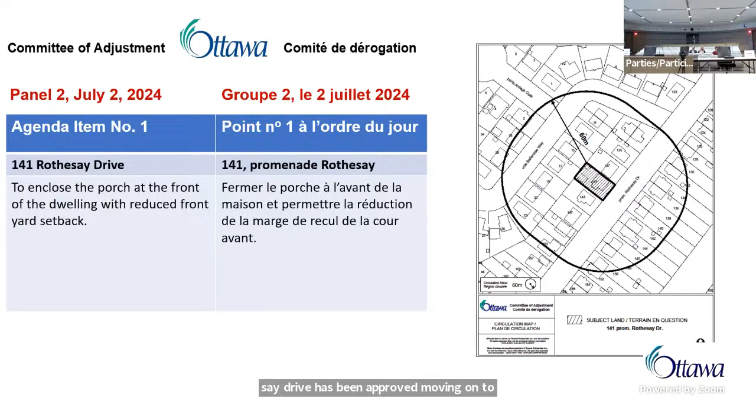Moving on to application 2, 1356 Louis Lane. All those in favor of approval of this application, please raise your hands. Application for 1356 Louis Lane has been approved.

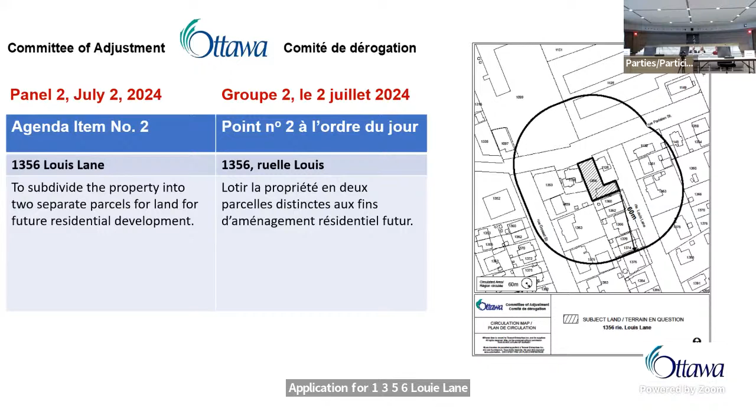Next application is 1359 Gosset Street. All those in favor of approving this application, please raise your hands. This application for 1359 Gosset Street has been approved.

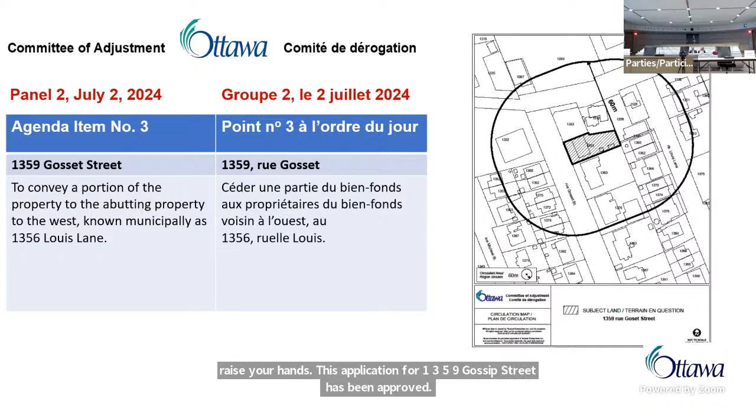Moving on to application for 556 Mansfield Avenue. All those in favor of approving this application, raise your hands. That application is approved for 556 Mansfield Avenue.

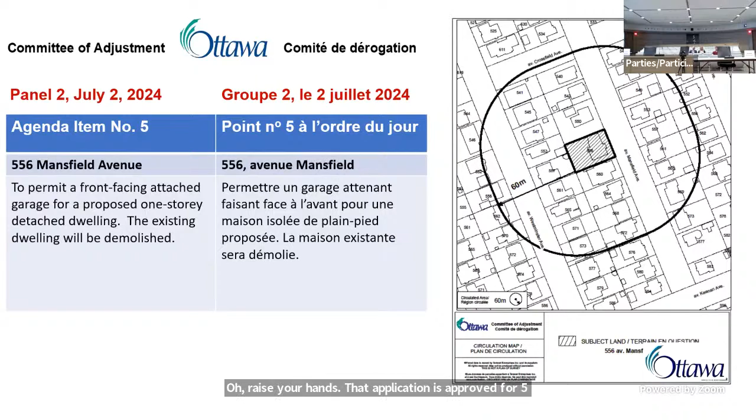Next on the list is 383 Longworth Avenue. All those in favor of approving this application, please raise your hands. Application for 383 Longworth Avenue has been approved.

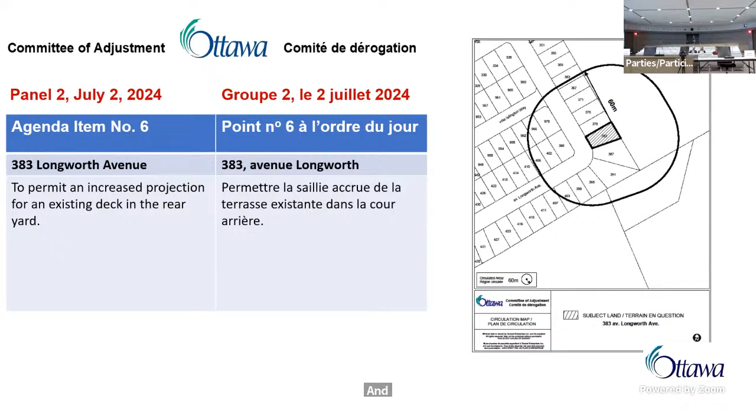And now the last unopposed application is 130-150 Rossignol Drive. All those in favor of approving this application, please raise your hands. That application for 130-150 Rossignol Drive has been approved as well.

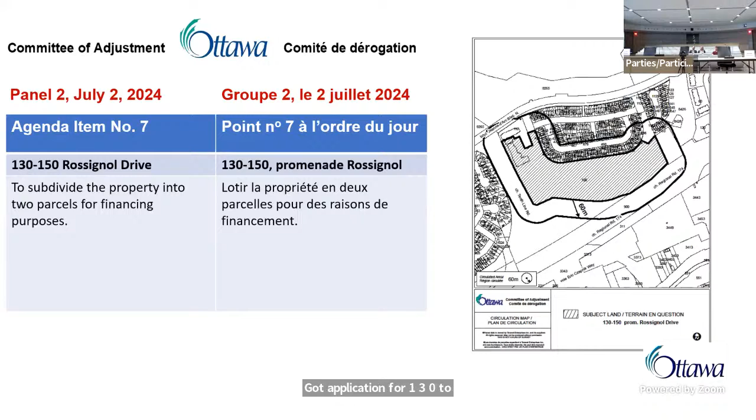Now we'll move on to the applications in order, beginning with 630 Montreal Road. Nadia De Santi, are you available?

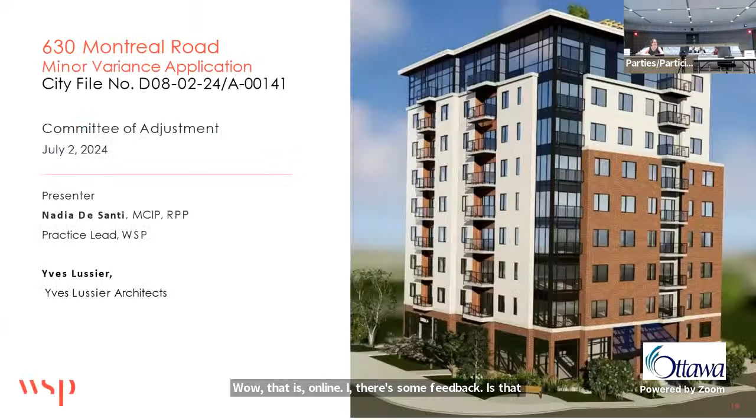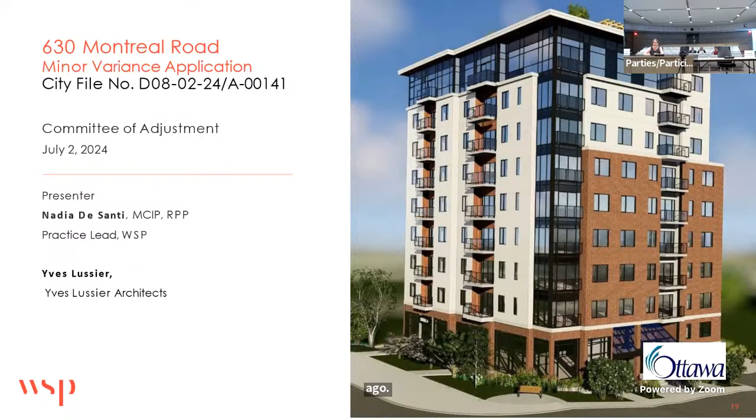I would like to start off, Mr. Chair, to indicate that this site did come before the Committee of Adjustment a couple of years ago and was adjourned. We've also been working with city staff on a site plan application that's been ongoing concurrently. We're at the tail end of that approval. There's just a phase 2 ESA report being conducted, and this process needs to complete before we can resubmit on the site plan with that additional report and hopefully get city approval. So next slide, please.

So 630 Montreal Road is an irregular shaped lot. It's a corner lot that fronts on Montreal Road, and the side street is Borthwick Avenue. It is approximately 0.103 hectares in size. It contains, or currently has, a one-story building and a one-story detached garage sitting on the site, both vacant. To the north of the site is a 14-story high-rise building, as well as some parks and commercial and retail, as well as some low-rise residential to the east and south.

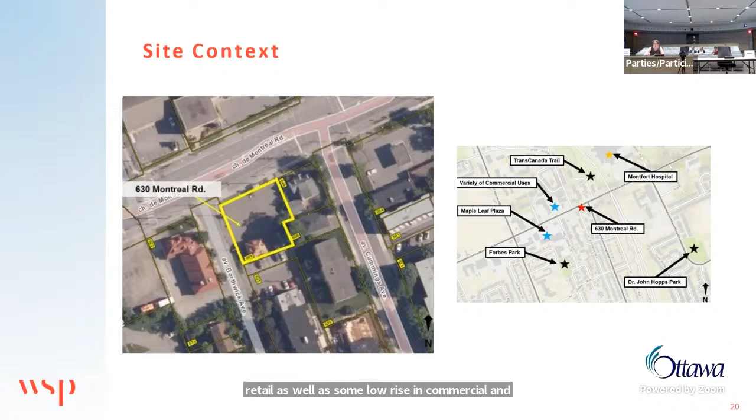Next slide, please. The proposed development is for a 9-story mid-rise mixed-use building with commercial at grade and containing 56 dwelling units. Our client has indicated that they are looking for 15 to 25% of those units to be affordable housing. They've had conversations with CMHC and continue to do so, so the intent is that it would be rent-geared-to-income units for this property, and it would contain a mix of 1 and 2 bedroom units.

The commercial space on the ground floor is about 206.5 square meters, and the residential units would be located from the 2nd to the 9th story. The proposal includes an underground parking garage containing 33 parking spaces, 29 for residents and 4 for visitors, as well as 39 bicycle parking spaces. There's a mix of landscaping and internal pathways to provide connectivity within the site and to the surrounding road network. There's a total of 17 ornamental and small ornamental trees proposed to be planted along the front, corner and interior side yards, as well as shrubs and perennials.

The proposed variances we're seeking are: a rear yard setback from 7.5 meters to 1.697, shown by the yellow on the bottom of the site plan, to the concrete wall for the underground parking garage, specifically the wall of the concrete ramp going down. We're also seeking interior side yard setbacks of 0.32 and 0.96 meters. The site jogs a bit in the southeast corner, so the setback requirements are a little complicated - we meet the requirement for the first 20 meters, but towards the back end of the property we don't comply. We're also seeking a building height variance, so 5 variances total to permit the 9-story building.

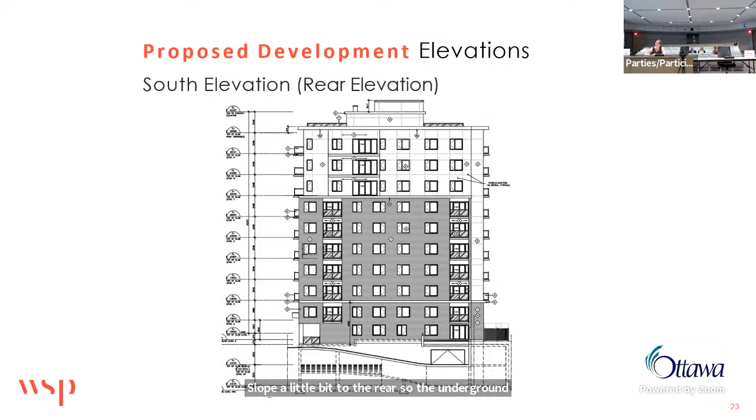I'll just go quickly through the elevations, please. Sorry, I can't see the timer so I don't know how much time I have left. Okay, so quickly through these - north elevation, next slide please. The south elevation, you can see here the property does slope a little to the rear, so the underground parking is designed to accommodate that slope and the ramp. Next slide, please.

So from the official plan perspective, the site is designated within the urban boundaries, part of the outer urban transect. It's designated as corridor Main Street, subject to the evolving neighborhood, as per Schedule B3 outer urban transect. A range of residential and non-residential forms and uses are permitted. The proposed 9-story apartment building is within the maximum permitted building height of 40 stories for lands designated corridor Main Street.

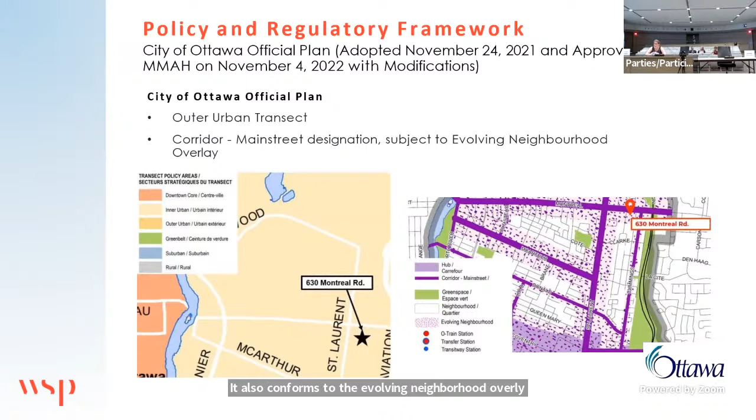It also conforms to the evolving neighborhood overlay policies, which supports development that permits and promotes intensification, new building forms and typologies.

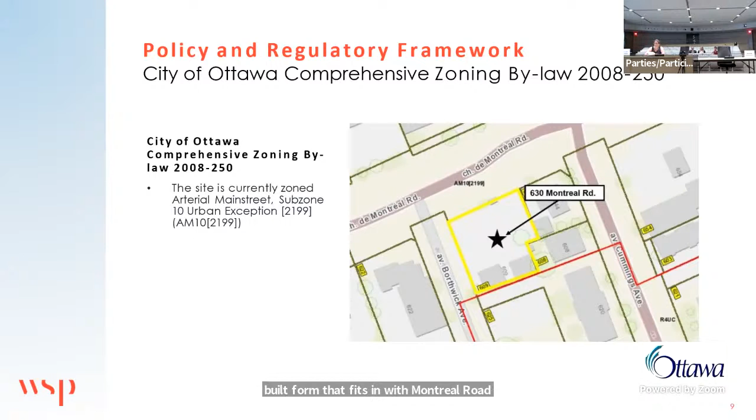The existing site is zoned Arterial Main Street, Subzone 10, Urban Exception 2199. Subzone 10 contains special setback and building height requirements. The exception is for an automobile dealership, which is not a use being proposed for the property. The proposed development complies with the majority of the applicable provisions of the AM10 Exception Zone 2199. The development has been designed to reflect a compatible built form that fits in with Montreal Road and Borthwick Avenue. As mentioned, there are 5 variances shown on the next slide.

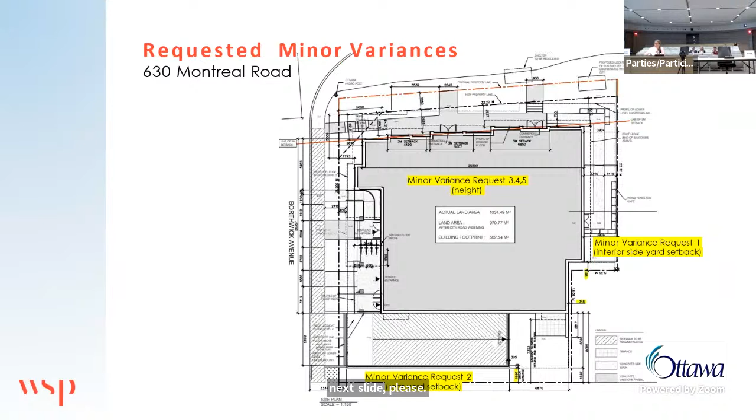I'm just going to go through the 4 tests. The variances that we're seeking are minor. The interior side yard and rear yard setbacks and the increase to the building height are required to accommodate the new building footprint and the 9-story building.

Given the site's irregular and unique shape, it would provide housing units, including affordable housing units, and commercial floor space. The maximum building heights are required to accommodate the proposed development, which aims to provide residential intensification and commercial development in an urban area along Montreal Road, an arterial road as designated in the official plan. This area is a prime location for this type of development, contributing to the overall mix of uses. Furthermore, there is a similar development with a higher building footprint to the north, a 14-story high-rise building.

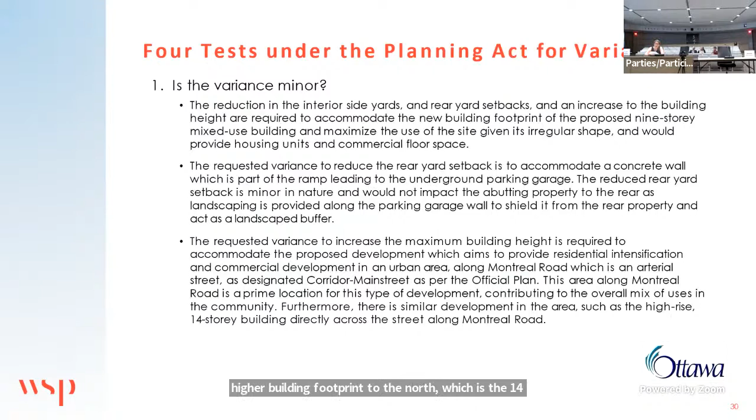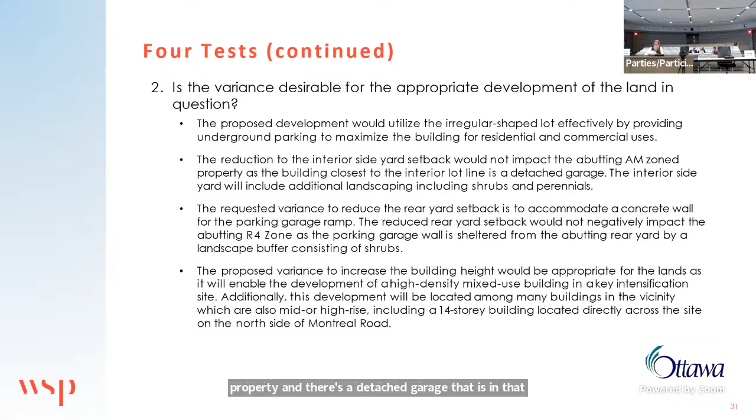The variances are desirable for the appropriate development of the land. Given the irregular shaped lot, we are seeking some variances to accommodate that. The interior side yard setbacks abut the adjacent property, and there's a detached garage in that corner where the interior side yard setbacks are being sought.

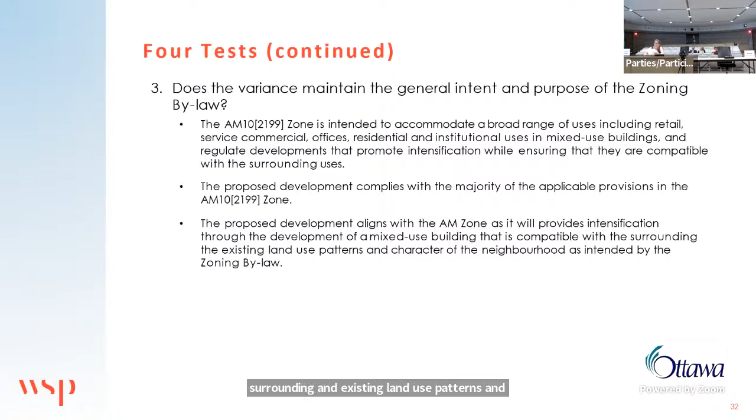The proposed development maintains the general intent and purpose of the zoning. The uses are permitted; there are just a few provisions that we are seeking variance for. The mixed-use building is compatible with the surrounding and existing land use patterns and character of the neighborhood as intended by the zoning bylaw. And finally, the variances maintain the general intent and purpose of the official plan.

As mentioned, the site is in the outer urban transect. Montreal Road is a corridor Main Street and is in an evolving neighborhood overlay. The official plan permits building heights ranging up to 40 stories. The proposed development at 9 stories is within that permitted maximum height, and it also includes a mix of residential and commercial uses.

Therefore, the proposed variances maintain the intent of the official plan by maintaining the provisions of the outer urban transect in the corridor Main Street designation. It also supports the city's housing goals of increasing housing options while maintaining the character of the surrounding neighborhoods in terms of land use and design.

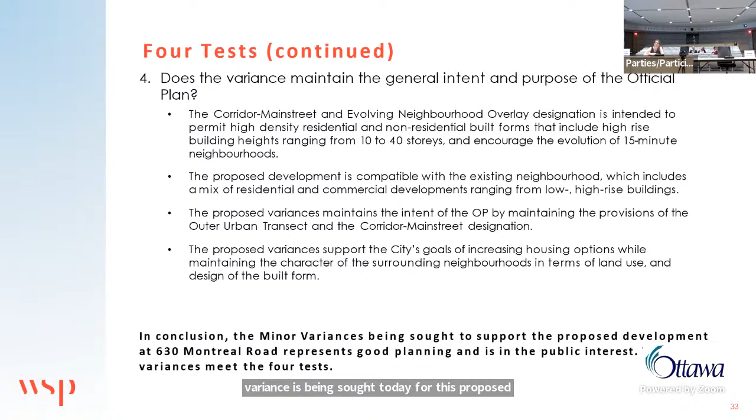In conclusion, in my professional opinion, the minor variances being sought today for this proposed development represent good planning, are appropriate, and are in the public interest. Thank you. Now I'd like to ask the panel if they have any questions.

Ms. McLean: Thank you, Mr. Chair. Just a concern about the reduced interior side yard down to 0.32. Normally a required side yard is to allow for fire access and maintenance of walls. I'm just not sure how that would be addressed with this design.

If I may, Mr. Chair, I'd like to ask if Mr. Lussier, our architect, could come in to describe the building design. Overall, the intent was to propose a development while as much as possible keeping with the zoning bylaw provisions, but also providing for the number of units and achieving housing goals. Mr. Lussier, if he can be promoted to speaker, can speak on the design.

Good afternoon, Mr. Member of the Committee, Mr. Chair. The setback is smaller on that area because the land is chopped off, if I can say that. We provided a full wall all in masonry, so for fire there's no problem because there are no openings and it's not a combustible material.

The part of the building will also be sprinklered. There's access from Borthwick and also access from the other side, from Montreal Road, through the courtyard. So it's a very small portion of the building that is not accessible, but there are no windows, no openings—absolutely nothing.

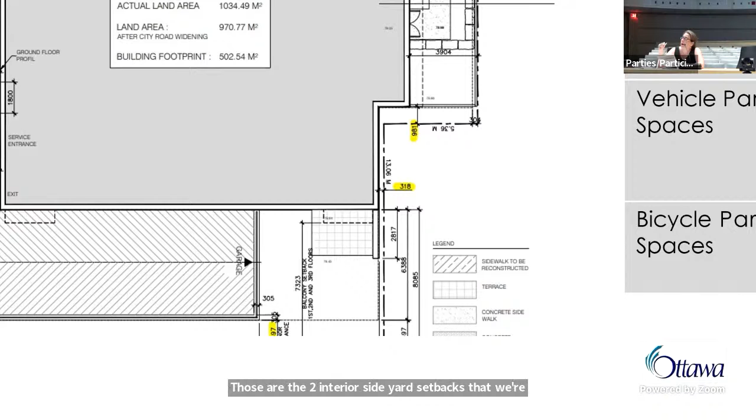And then the rear yard setback that we're requesting of 1.697 meters is the one on the bottom, on the south part of the property. And that's from the property line to the concrete wall for the underground parking.

Okay, so a clarification on that: is that concrete wall below grade or above grade? I will ask Mr. Lussier to help respond. This was back and forth with the city on this variance. Mr. Lussier, can you explain how that is intended? My understanding is it's a concrete wall, but I'm not sure exactly how it's going to be constructed fully, so Mr. Lussier can explain the constructability of that.

And if it's below grade or near grade, I'd also like to know the actual distance from the rear lot line to the back of the building. Okay, Mr. Lussier? Yes, Mr. Chair. The wall is 42 inches as per code, so people do not fall off. It's only 42 inches, and it's concrete.

As for the full distance from the building to the sight line, it is 8.085 meters. So the actual setback of the building is 8 meters to the property line.

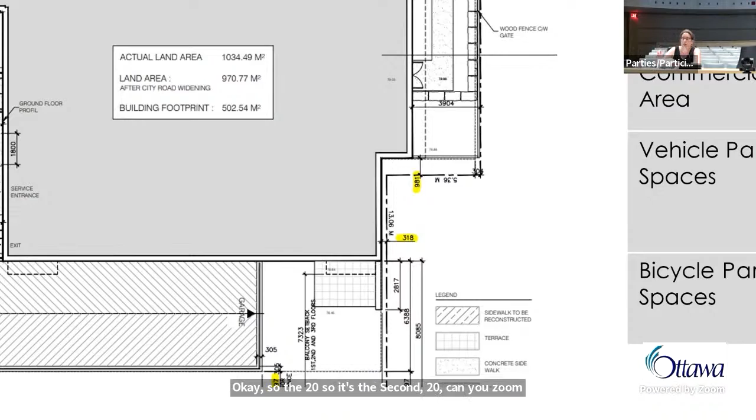Okay, so the 20 meter, hold on a second, can you zoom forward, like zoom to the top of the screen please? Okay, so I'm having difficulty with my vision today. So there's the, Mr. Lussier, are you able to assist on the dimensions here, where the 20 meters for the building height is?

I no longer see Mr. Lussier. So first of all, I should have mentioned that there is a proposed right-of-way protection for Montreal Road of 37.5 meters. We have accommodated for that right-of-way protection, so all setbacks are being measured from where that new front yard line would be.

But the ones we're talking about right now are from the rear, correct? Because it's from an R4. So the way these were... oh yes, right, sorry. The only R4 that exists abutting your lot is the rear lot line. Yes, sorry, I was looking at it from the street provision, yeah.

So where's the 20-meter mark from the R4? And there's a mysterious line on the right there, and I was wondering if that's what it is. Okay, is Mr. Lussier still on? Yes, he is, below, where it says wood something gate.

Okay, Mr. Lussier, are you able to help point out with the line from the abutting R4 zone please? You're going to need to unmute yourself. I'm here now, I couldn't talk, if I was talking nobody could hear me.

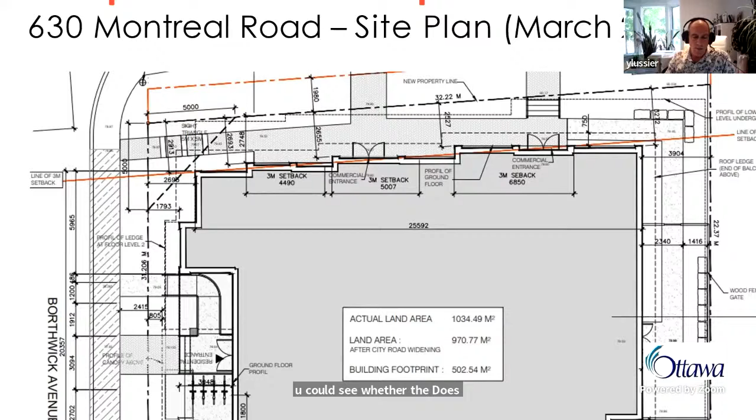So the 20-meter, so if we look at the elevation you could see what, there's a building at 8 meters that stops up to a certain 6th floor, then it goes back another additional, and it's the exact line. I will try to give it to you.

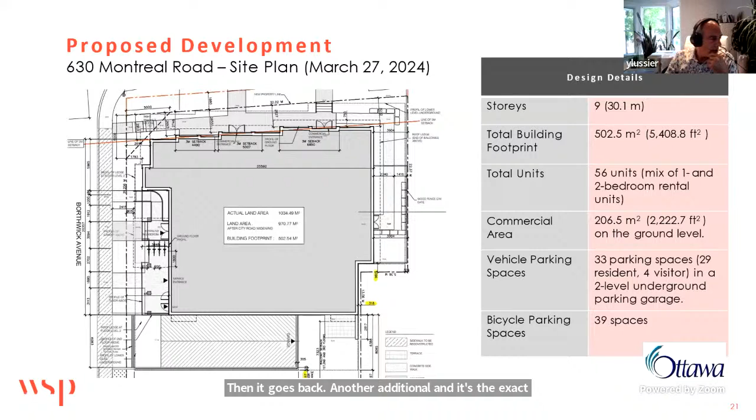Can we put up an elevation drawing please? Yeah, the elevation would show it if you take the side one. Does this work, Mr. Lussier? No, next one, next slide please, the next one, a side elevation.

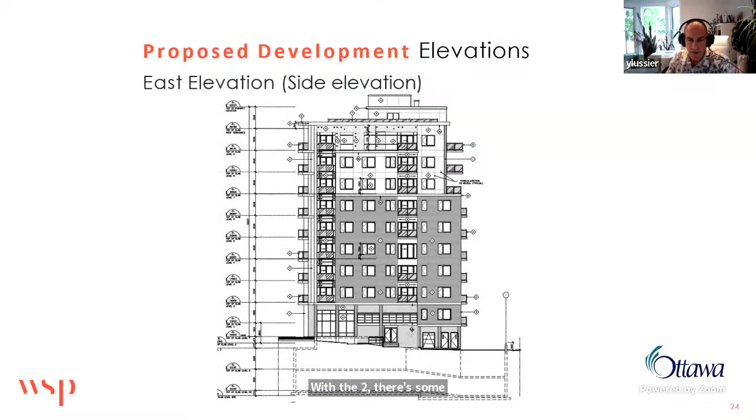There, thank you. Okay, yeah, you see the line that's in the back is the 8-meter line, and then it goes back again. With the balconies at the top after the 6th floor, it goes back again. And that distance would be, I'll

tell you, I'm in AutoCAD now, I will give you exactly the dimension.

But I'm finding it very difficult to assess these variances without being able to see on a site plan where, what part of the lot each variance applies to, which I was not able to find anywhere in here. And looking at it in elevation doesn't tell me where on the lot, how much of the building each of these applies to.

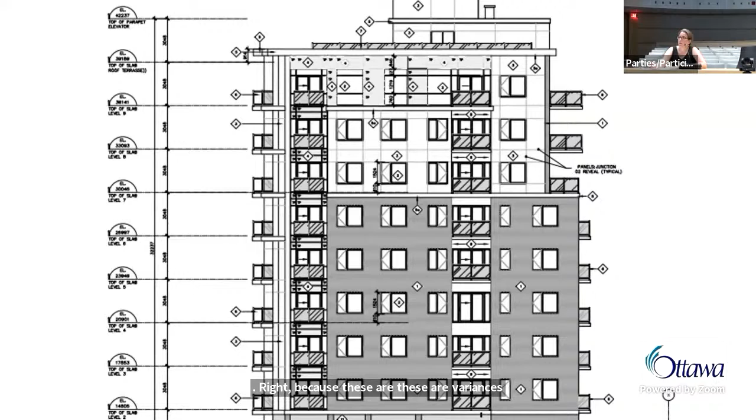Right, because these are variances essentially of elimination. For the first 20 meters it's X, and then for 20 to 30 meters it's a different height, above 30 meters from the R4 it's 30 meters. And the entire lot, as far as I could tell from GeoOttawa, is about 33 meters in depth, right? And then there's a setback at the front.

So I'm not sure that any of your building falls in the greater than 30 meter from the R4 portion of this. So there would be just the two variances, the one for up to 20 meters, and the one from 20 to 30 meters, which would be 15 and 20 meter heights permitted, and you're asking for 15 to 30.1 and 20 to 30.1. And then there's this mysterious final variance E, which I'm trying to figure out what part of the building that actually applies to. But it would be good to be able to see what C and D are.

So I assume about 2/3 of the way through that lot, working forwards, which isn't marked anywhere, is the variance from 15 to 30 - correct, it's about 2/3 of the lot. And then I think the entire rest of the building, all the way to its front facade, is going to be subject to the second variance D, which goes from 20 to 30.1, correct?

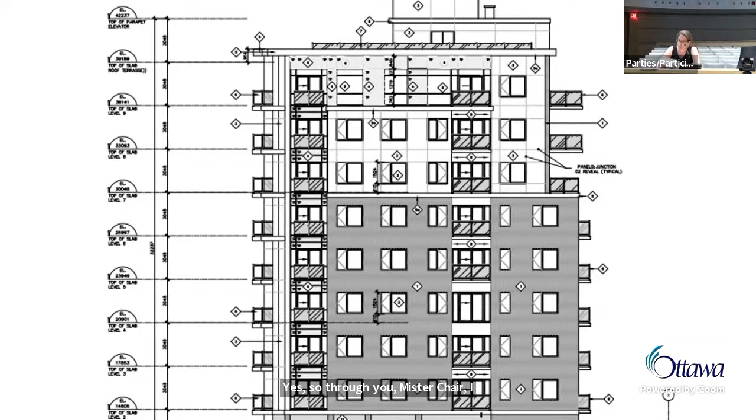Yes, so through you Mr. Chair, I'm not sure if the city planning staff can help, because we went through with city staff on this a few times. Maybe I'm happy to defer. Who's the planner trying on this?

As you can tell, I spent some time on this application trying to figure out what each variance was, and I was able to sort of work my way through the first four, but the fifth, I really couldn't find a piece of either the zoning bylaw or the building that it applied to.

Ms. Horn, can you give us a hand? Thank you, Mr. Poulet. My colleague Margot is online and she can help. She was on the pre-consultation. Hello, Ms. Linker? Hi, good afternoon.

If staff would like, there is an alternative wording for this variance if the applicant would be willing to change the wording, that would essentially capture all three variances into one. I can find that wording that was previously written, and that might clear up some of the confusion.

Sure, how will you get it to us? I can read it out loud and submit it to the committee for the decision. Okay, please go ahead. Sorry, just one minute, I'm just looking for the alternative wording. Okay.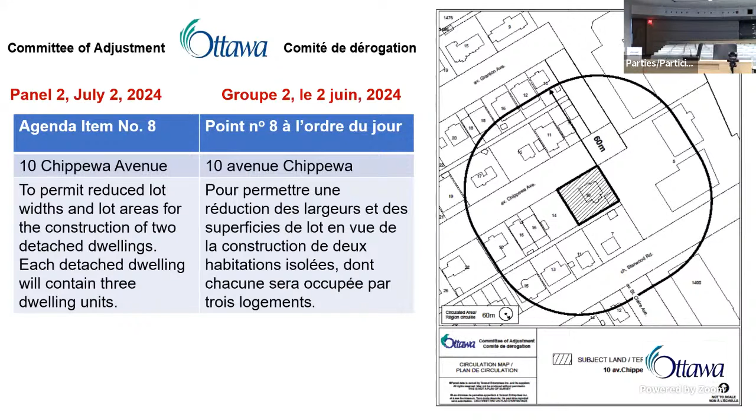Hello, Ms. Murray. Good afternoon. I think we understand pretty much the essence of this application, we've went through it a couple times already. So I just want to jump right into questions from the panel regarding this application. Ms. McLean, start us off. No questions? Okay, Mr. Barrett?

Well, Mr. Barrett's looking for that. We'll go to Ms. Wright. Hi, Ms. Murray, would it be possible for you to walk us through why you're doing the 2 driveways instead of what was shown in one of the applications as one? Sure. Yeah, and I can talk about them simultaneously, realizing there's 2 separate applications here, and the circumstances are slightly different.

The client had originally prepared an application with the 2 driveways on the outside of both buildings on each side. In reviewing mainly the tree impacts, we had the forester do the report and reviewed that with the city back at the end of last year. The suggestion was made to look at a paired driveway in the center of the 2 properties, which we did go down that route. We had the architect revise all the drawings, and then we understood there was implication of needing to get a full severance on both properties.

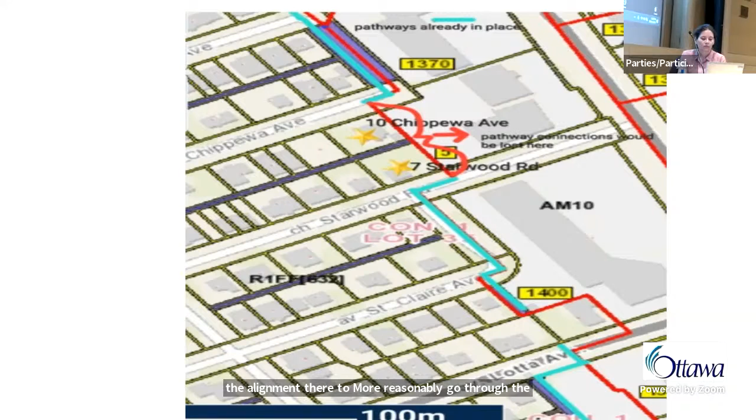Yeah, but the houses have garages. In many other areas, when multi-use pathways have been taken or the land has been taken, the easements have been established. It's often been along large developments that are being proposed or redevelopments, which would seem, even from the alignment there, to more reasonably go through the rear of those large commercial properties.

I think if you probably don't know the history of City View, all of those streets used to come out onto Clyde Avenue, and they've closed some of them off, so they're like a U horseshoe at the end, and that's the end of those streets is where they've made these multi-use pathways along there. So none of them run in the commercial. You can see in the picture that none of them run along in the commercial area, but they run along between the houses and the commercial, and that's usually because there's that little road that goes through there. They don't call it a road, but the little pathway that goes along there.

But they didn't close off Starwood. They did close off Chippewa, so Chippewa's got part of it, but it doesn't come between Chippewa and Starwood. So I'm not sure how that would work, but...

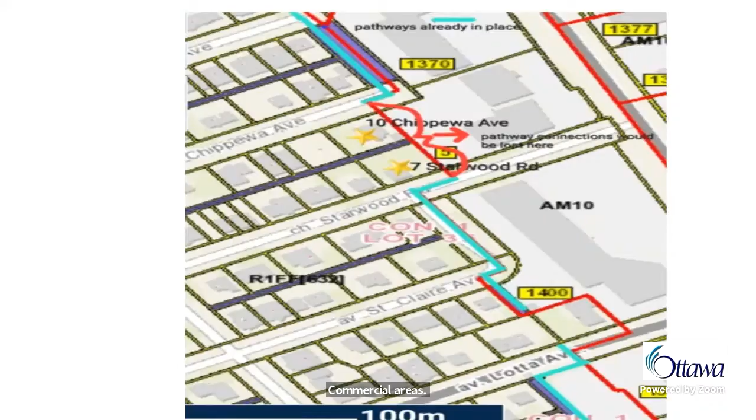If something's not done, then that's lost forever. And like Jill said, there's all parking lots in the back of the other commercial areas. It's the Bleecker Mall, so it actually has a high rise with legal offices and a number of other things there. So they need the parking on the rear. There's a whole row of parking on the rear of that building.

Right, okay. We won't debate that here, but I was just getting to the idea that it's lost forever. I think there is certainly a future opportunity to take a multi-use pathway width of land from such a large lot, especially if it gets redeveloped in the future. But anyway, it's not a major consideration. Thank you.

Thank you. Ms. Wright, do you have any questions? No, not anymore. Mr. Barrett, do you have any questions?

Yes, through you to staff. Was front yard parking discussed with the applicant during your consultation period?

Thank you, Mr. Barrett. So I wasn't part of the original pre-consultations where they went back and forth about the driveway location, but my understanding is that it was always rear yard parking that was discussed. And from staff's perspective, until the new zoning bylaw changes, it is preferable not to have parking that's oriented towards the street. So typically when we see proposals like this, where it's proposing rear yard parking, that's why we don't have concerns, because it is generally ideal.

So, and this wouldn't be a case—I know if I got this proposal today, I wouldn't be likely suggesting, typically wouldn't be pushing hard against rear yard parking again. Obviously, there are circumstances, like with all the trees, where perhaps front yard parking is ideal, but if the applicant is looking towards a non-automobile oriented situation, it's difficult for us to have strong concerns about that.